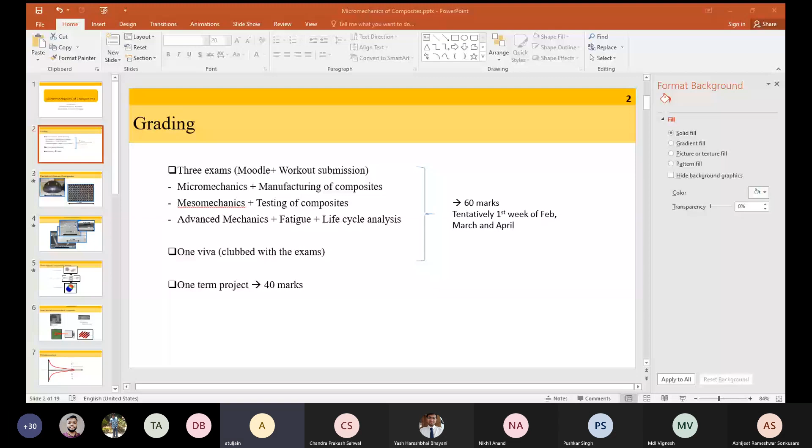Excuse me, sir. Will you please use the highlighter to point out? I wanted to write also. Okay, okay.

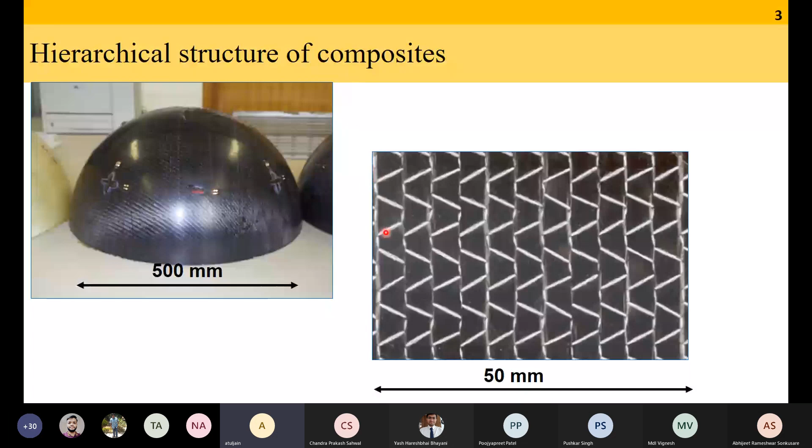So, as I was saying, this is a composite part which is, let's say, half a meter wide. If you zoom inside and start at 50 millimeter zooming, you see this. This white is your fibers. These are textile composites. This black is predominantly where there is matrix, but fiber which is perpendicular to the screen. If I zoom in further, I start seeing this, where these white lines are the fibers, black is the matrix, and this is the reinforcement in different directions.

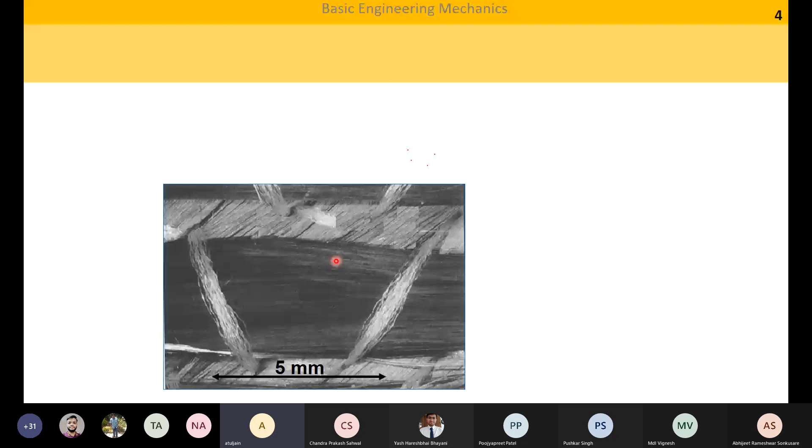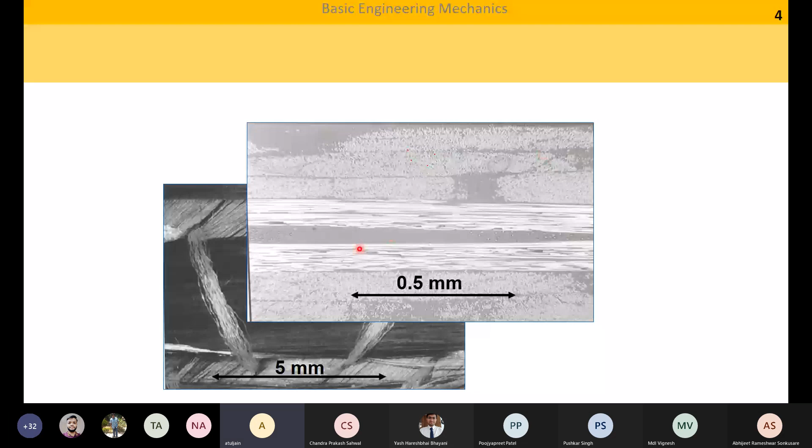At half a millimeter, you will see this. Again, you can clearly see the white as the fiber, black or gray as the matrix. If we zoom even further, this is what we are going to see - these are fiber cross sections. Fiber is perpendicular to my screen.

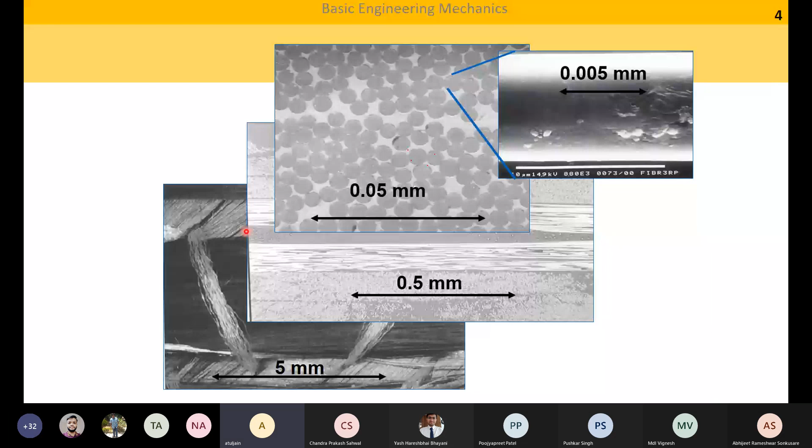And if I zoom even further and start looking at nanometers, at the surface of the fiber, I can look at different defects. So we want to calculate the effective properties of this part, based on all the microstructure information that we have. This is the challenge that we have.

Now, to do this, there are usually 3 steps in composite design. The first step is what is known as micromechanics. Micromechanics is the mechanics at the constituent level. Constituent level means at the fiber and the matrix level.

The next level is known as mesomechanics. Mesomechanics is mechanics at the building block level. So I mix fiber and matrix and I get a lamina. Now, what is happening inside a lamina - if I don't care, if I know the properties of the different lamina, mechanics at that length scale is known as mesomechanics.

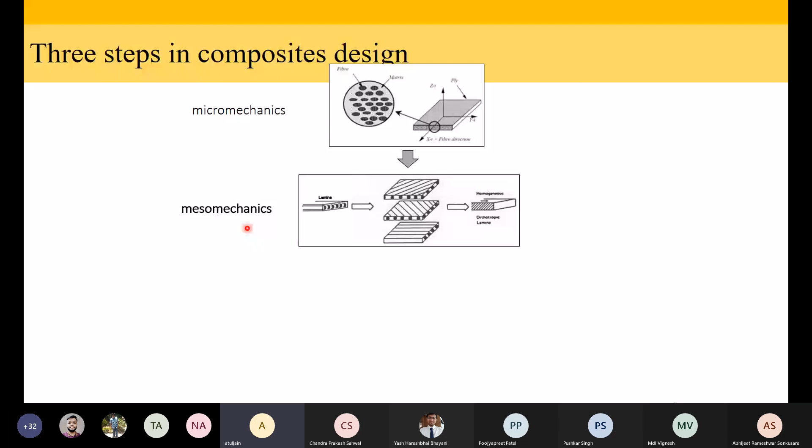And finally, I have the component level. If a part is made out of composite materials, that is known as macromechanics. So to do a successful design of a composite material, you will need knowledge of the micromechanics and the mesomechanics. The macromechanics is usually through an FE software, so we will not worry about macromechanics so much in this course, only micro and mesomechanics.

Again, I'm repeating: micromechanics means mechanics at the constituent level. Constituent is fiber and matrix. If the properties of the fiber and the matrix are known, what is the property of the lamina? This is micromechanics. Once the property of the lamina is known, and if I have multiple lamina one on top of each other, what is the property of my laminate? This is your mesomechanics. In the mesomechanics, we don't care what the fiber is, we don't care what the matrix is - we just care about the effective properties calculated from the micromechanics.

And finally, macromechanics is at the component level. So the first 1/3 of our course is micromechanics, the next 1/3 is mesomechanics. A very important point to note is that even though we use the term micromechanics, it has nothing to do with the length scale micrometers.

It so happens that the radius of the fiber is of the order of microns, so it's easy to say that fiber-based mechanics is micromechanics because the order of magnitude of the fiber is microns - but that is not the case. Even if I had a fiber whose diameter was, let's say, 1 centimeter, and I am studying mechanics at the constituent level, it is still micromechanics. Any questions about the 3 steps in composites design?

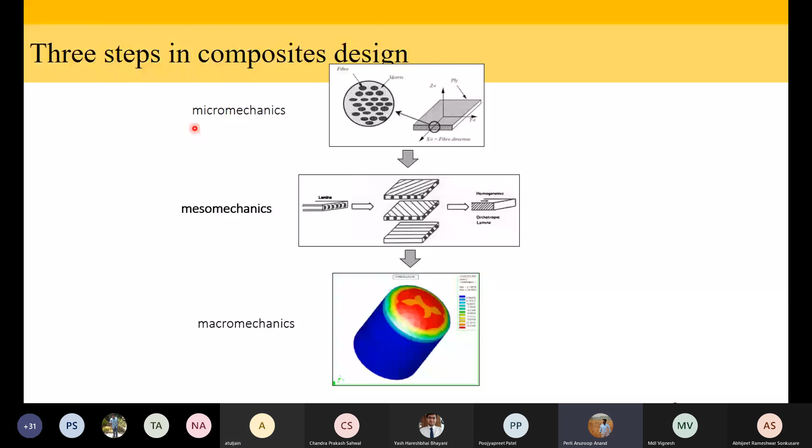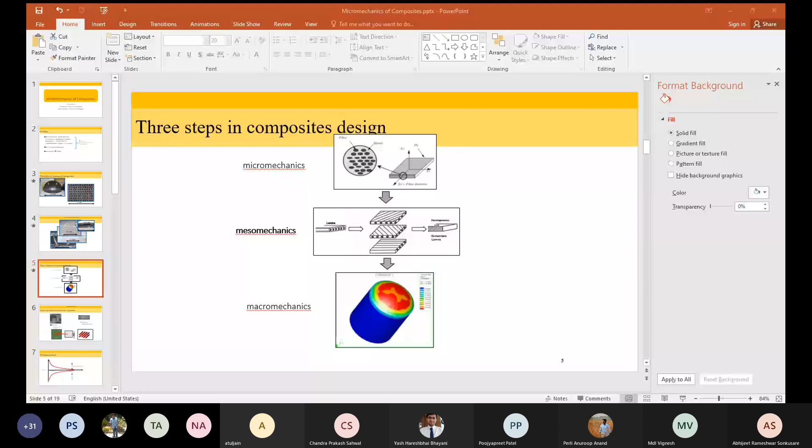Yes, any questions, anybody? If it is clear, then we can go to our next.

So basically, another way of looking at micro and mesomechanics of composites is to take the example of a textile composite - these are fibers which are perpendicular to each other. If I look at the fiber bundle as a whole, then it is mesomechanics. If I look at fibers inside a yarn, fiber and matrix, this is micromechanics. Meso, micro - and initially we are focused on micromechanics.

Okay, so what is homogenization? The single most important topic while studying the mechanics of composites is what is known as homogenization.

To understand what is homogenization, imagine a plot where you have on the y-axis the relative properties, and on the x-axis the length scale. Now, let us say I have a probe based on which it can travel at a small length scale and give me the properties at that region.

For example, if my probe can give me properties in the vicinity of 10 to the power minus 3 nanometers or even lower, there are going to be places where I will hit empty space, so the property is going to be very low, and there are going to be places where I'm going to hit atoms and the properties are going to be very high. So there is going to be a large variation in the property if my probe is of the size of 10 to the power minus 3 nanometers.

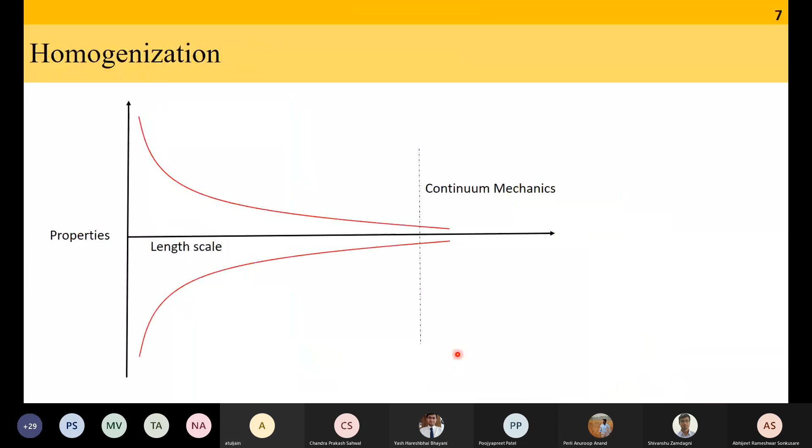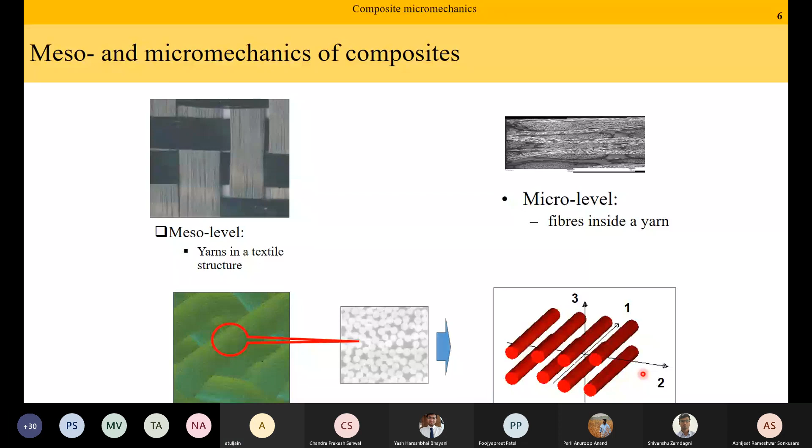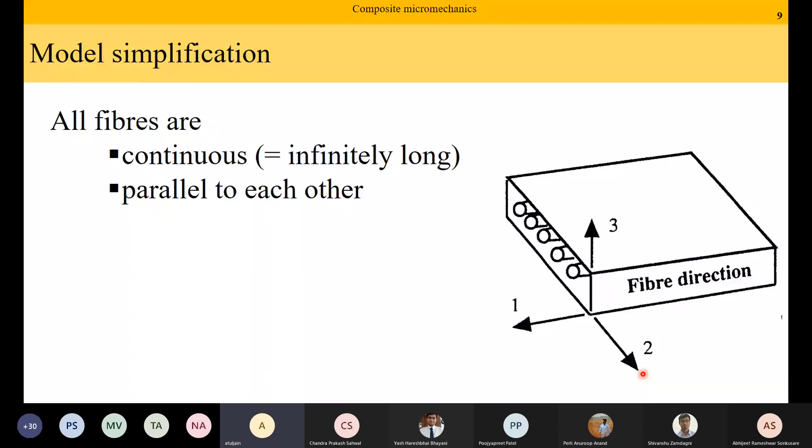We want to calculate both the Young's modulus in the 1, 2, and 3 directions, and similarly the shear modulus. So first of all, we will calculate the longitudinal modulus. What do you mean by longitudinal modulus? It is the modulus of your unidirectional composite in the fiber direction. So based on this figure, modulus in the one direction is your longitudinal modulus, and the modulus in the 2 and 3 directions are your transverse modulus—meaning transverse to fiber direction, but in short we call it transverse modulus.

So let us calculate the longitudinal stiffness. The figure that you see is a simplification of your composite material—the white is your matrix, gray is the fiber. We are assuming that if it is a rectangle to start with, and I pull it in the one direction, it will still remain a rectangle, meaning that the strain in the fiber and the matrix is the same. This is known as the isostrain assumption. The planar cross section will remain planar, which we can say because the fiber cross section is not changing as a function of the length.

If the fiber geometry is not changing as a function of the length, then the planar section has to remain plane. This is the isostrain assumption. Under the isostrain assumption, strain in the one direction in the fiber equals strain in one direction in the matrix equals strain in one direction in the composite.

But the load is added. If you apply a force P, PF is taken by the fiber and PM is taken by the matrix.

Is this clear? Everybody understands what is the isostrain assumption? Yes, sir. Should I repeat? Sir, in the figure, the center rectangle part is the fiber and the surrounding part is the matrix.

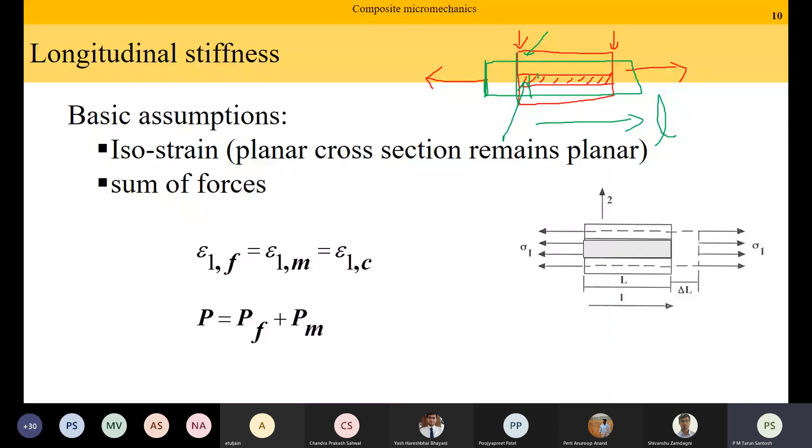Based on this isostrain assumption, you can calculate the effective properties, which is basically a simple rule of mixtures. If I know the volume fraction of the fiber, the volume fraction of the matrix, and the modulus of the fiber and the matrix, I can calculate the apparent or effective modulus of the composite in the longitudinal direction.

This formula also tells me that as I increase the amount of fibers, the modulus typically increases in a very linear fashion. More fibers, more modulus.

Now, another point is what will happen if your fibers are of different kinds? Meaning half of your fiber is glass fiber and half is carbon fiber. Then how can you calculate the effective properties? Anybody, what do you think will happen? Go back to the derivation.

Instead of only one type of fiber whose modulus was EF, let us say there were two fibers, one modulus EF1, the other EF2. Then how would you calculate the effective properties? How would this formula change?

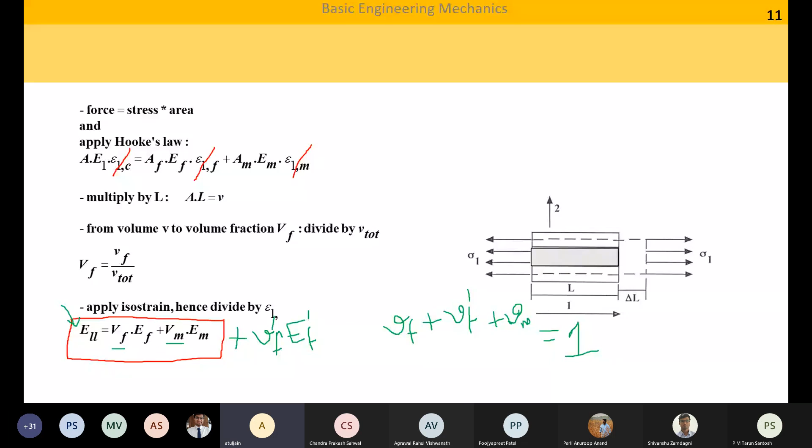Can I now go to the transverse to the fiber direction stiffness? In the transverse stiffness, basically we are trying to find a relationship between stress in the two direction and the strain in the two direction.

While calculating the transverse stiffness, we make what is known as the isostress assumption. If you take a unidirectional composite material and load it transverse to the fiber direction, the stress in the fiber is equal to stress in the composite is equal to stress in the matrix. While loading in the fiber direction, we said the strain in the fiber, matrix and composite were the same.

In the transverse direction, we make the isostress assumption, which says the stress in the fiber equals the stress in the matrix equals the stress in the composite, and the displacement is the sum of the displacements.

If I have this, after applying load, I can reasonably expect the composite will increase in length. If the initial length was L, then the change in length, delta LC, is the sum of the change in length of the fiber and the change in length of the matrix. The stress remains the same, but depending on the stiffness, the strain in the fiber and matrix may be different when loading in the transverse direction.

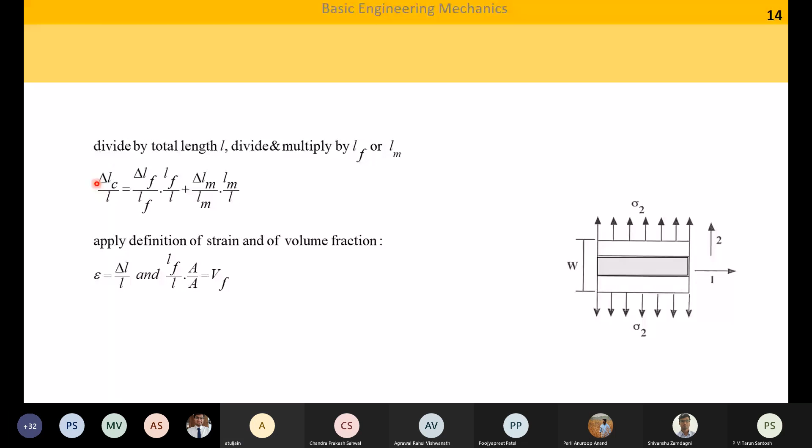Starting with this equation, I can say that the strains are added. So strain in the composite is equal to volume fraction of the fiber into strain in the fiber plus volume fraction of the matrix into strain in the matrix. Apply Hooke's law, which says that epsilon 2 is equal to sigma 2 by E, and you get this relationship.

We also know isostress, so stress is the same, so I can delete these parts and I will get this relationship: 1 by Young's modulus of the composite material is equal to Vf by Ef plus Vm by Em. Or you can also get this formula. This is known as the inverse rule of mixtures.

So based on our simple assumptions like isostress and isostrain, we can say that the modulus in the longitudinal direction can be calculated using rule of mixtures, and the modulus in the transverse to fiber direction can be calculated by inverse rule of mixtures. Is this clear?

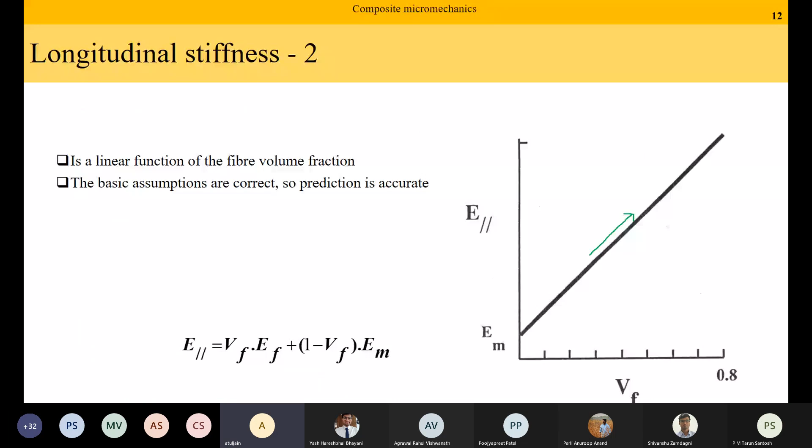I mean, if I had let us say 20% and then 30% fiber, I am increasing the fiber content by 1.5 times, but the modulus increase is only going to be 5 or 10%. On the other hand, after some critical value of volume fraction of fiber, even a small amount of additional fiber will increase my modulus to a very high content.

Okay, but now we have another problem. Do you think I can make a composite with 95% fibers? Is it possible?

Think of a rectangle, and in that you are trying to put circles. Can you fit in circles with 95% efficiency? No, you cannot do that. There are limitations. You can reach 60% fiber, you can reach 65% fiber, but after that in real life you are going to struggle. So a lot of this is actually only theoretical. It's very unlikely for me to make a composite with 80% fiber volume fraction. I will need fibers with variable diameters, and then I need some special things. So using composite materials for good properties in the transverse direction, at least this theorem tells us that it might not be the best idea.

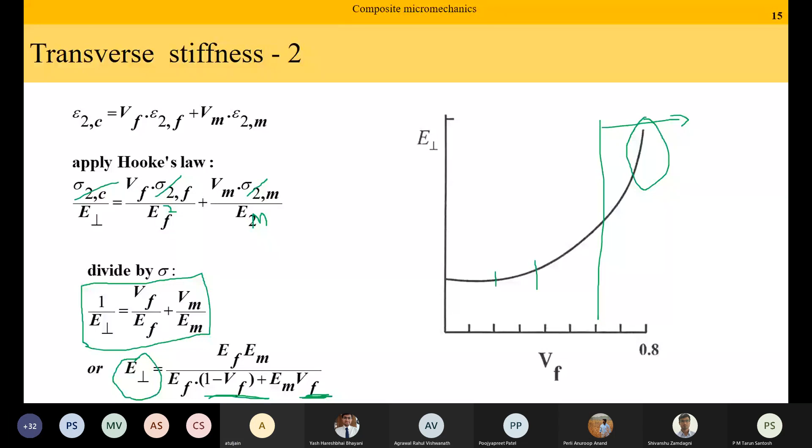Now let us calculate the Poisson's ratio, or what we call nu. We assume a load applied in the one direction, where we have isostrain. In the two direction, we have isostress. Nu 1,2 is defined as minus the strain in the two direction divided by strain in the one direction, when the material is subjected to uniaxial load in the one direction. Taking into account these assumptions—isostrain in one, sum of displacements in two—and noting that strain in the two direction is delta W, the change in length in the two direction divided by W, I can say delta W equals minus W times nu 1,2 times epsilon 1.

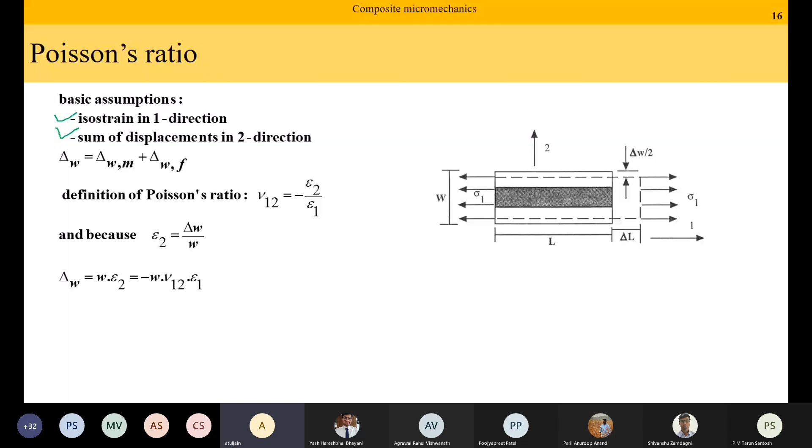In the two direction, it is the sum of displacements: the displacement of the composite equals displacement of the fiber plus displacement of the matrix. I am putting a minus sign because if I'm applying tensile load in the one direction, everything should be negative. Based on this, we can derive that the Poisson's ratio 1,2 varies in a linear manner, just like our Young's modulus.

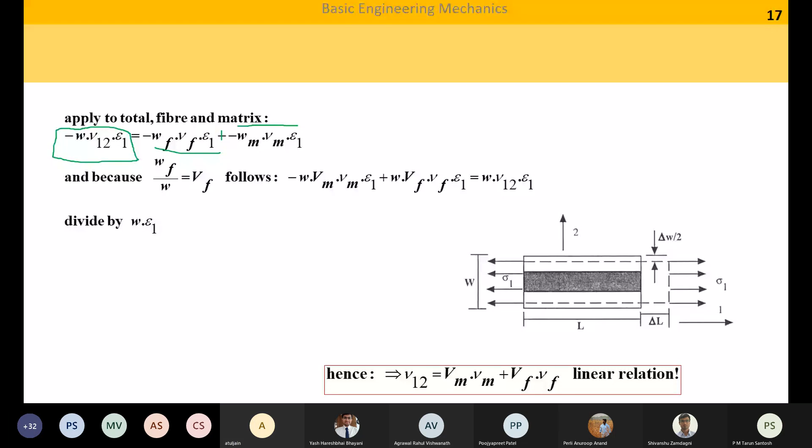Very simple derivation, exactly the same as what we've done before.

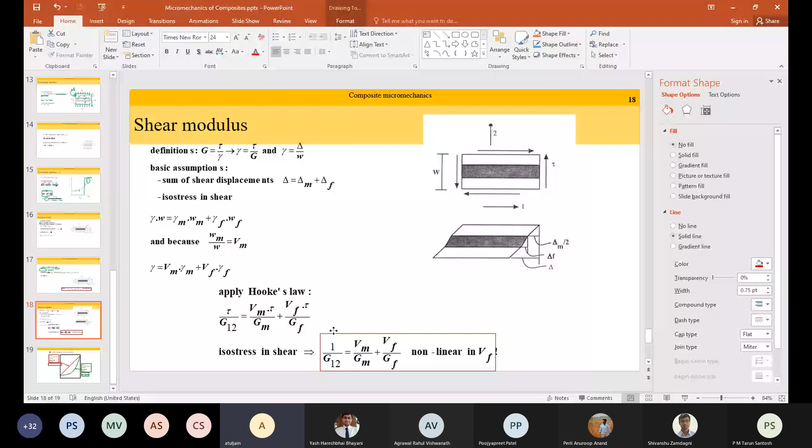Shear modulus. Now, how do you define shear strain? Shear strain is defined as the tangent of this angle. Is this how we define shear strain? And the assumption we are making is that the total strain in this direction has to be added up.

In other words, there is going to be some shear displacement here, some shear displacement here, some shear displacement here. If I add up all three, then I'm getting the total displacement from point 1 to the end point.

So in other words, we are saying that if I apply a shear stress to a unidirectional composite, the composite material shows isostress—meaning the stress in the fiber and the matrix is the same. In exactly the same manner as we calculated the transverse modulus, except using shear strain and shear stress instead, we find that the shear modulus is also non-linear in fiber volume fraction—it follows the inverse rule of mixtures. These are just the assumptions we are making at this time; I'm not saying this is right or wrong. If you make an isostress assumption in shear, this is the formula you get.

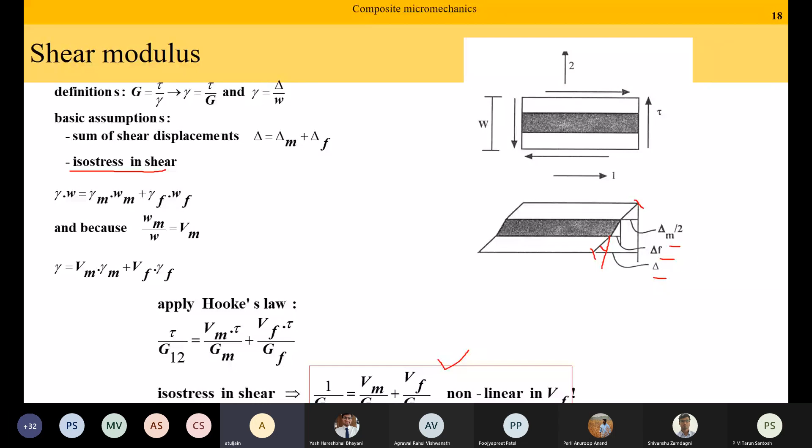So broadly speaking, all the different properties of a unidirectional composite follow one of two trends: either a linear rule of mixtures, for example the longitudinal modulus or the in-plane Poisson's ratio nu 1,2, or the inverse rule of mixtures, for example the transverse modulus or shear modulus.

Now we know that this linear rule of mixtures, which is based on the isostrain assumption, is valid because we have validated that the isostrain assumption is always correct. The isostress assumption is not always correct, it is just an assumption. So in the next class, we are going to learn how to make corrections to our isostress assumption.

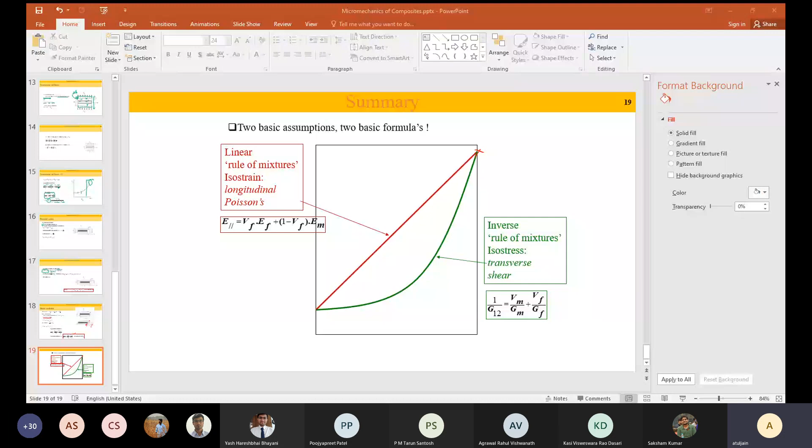Tomorrow we will discuss the validity of the isostress assumption and how we can make corrections to it. And based on the correction to the isostress assumptions, we will solve some numerical problems. Okay?